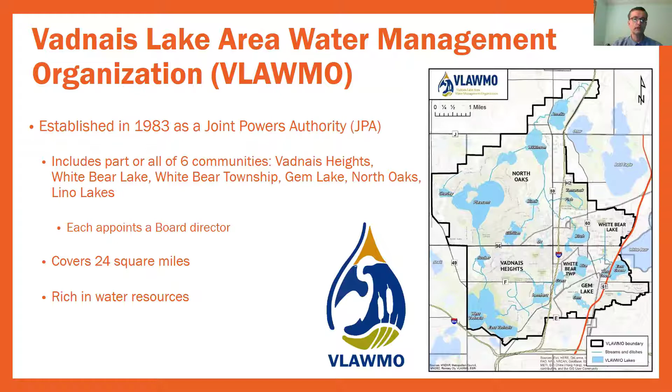Some of the core activities that VLAWMO is involved with its partners include flood management and storage, monitoring and analysis of our lakes, streams, and wetlands, program management and projects, pursuing grants and working with homeowners on various projects and programs, education and outreach including schools and workshops, and also managing the Wetland Conservation Act within the 24 square mile area.

A couple slides on introducing Lambert Creek. The VLAWMO board sees Lambert Creek as a critical priority water body within the watershed, and they are continuing to try to find areas to pursue multi-purpose and partnership-based maintenance operations, storage, and water management and water quality projects and programs within Lambert Creek.

4 critical priorities that we will continue to pursue, including with this project, is to identify and partner on pond projects to store the water and filter the nutrients and make sure that sediment is deposited where it's designed to go. Also to clear tree removal and brush out of the drainage systems and the streams.

Also water control structures called weirs, which you'll hear about tonight, to store water in the right place and meter out the water downstream so it doesn't cause additional problems downstream. And also critical research and monitoring, both from a habitat and water quality standpoint. You can see all these programs within Lambert Creek on our website at the link below.

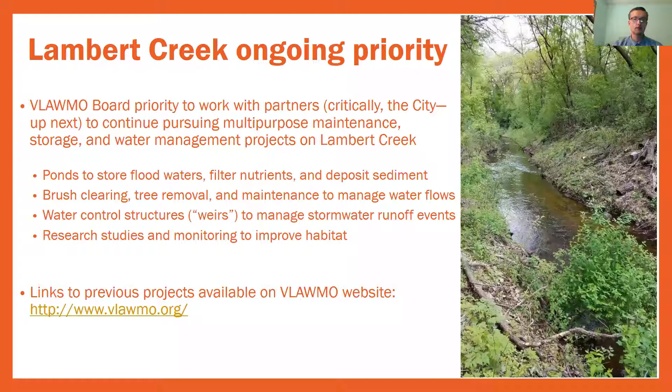I really want to help identify the partners of this project, and nothing we can do at VLAWMO can be successful without our critical partners, including the City of Vadnais Heights, who you're going to hear from Jesse in just a minute, as well as SEH, our engineer, the Minnesota Pollution Control Agency and Environmental Protection Agency, and the University of Minnesota. We couldn't do our work, and this project could not happen, without these great partners.

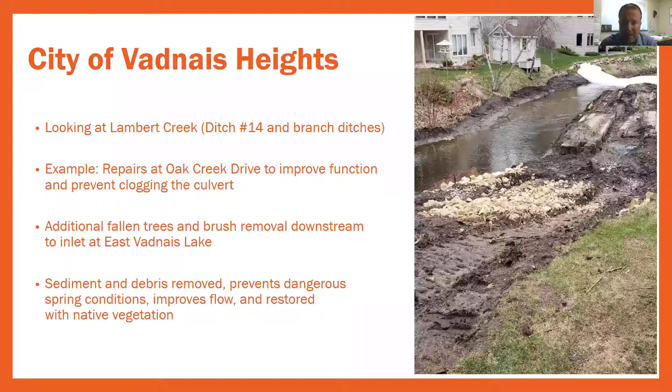And I think I have one more slide, right Nick? Yeah, there's a photo there—if you can see it, there's the project, a little closer to completion. Lots of times when people build things, they don't think about how to maintain them. So what you see there, and some of the things you don't see, are that we built in access to this project, and eventually it'll blend in better than it looks right now. We thoughtfully selected shrubs and native seed mixes, and there's also a maintenance component where even beneath some of the surface, there's aggregate we left in place, so the next time we need to get a backhoe down there, we'll have a way to do it.

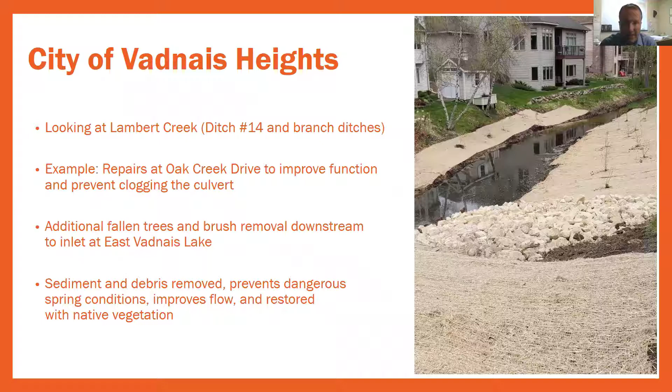Yeah, I think this might be my last slide here, I'm not quite sure, but that's all right. What you're looking at here is some of the sheet pile along the edge of where we're doing a project. Between the grasses and the water you see there, it looks subtle, but that's the sheet pile, and you can see how it's leaned over—eventually it would slough off into this water quality feature.

Some of this property is private property encumbered with a ditch easement, and some of it is owned by the city of Vadnais Heights—we have a parcel through here. Talking about this project a little more, you can see where access is intended to come off of County Road F, and where the sheet pile is getting replaced, that pink line. The photo and the plan view show something shaped like a triangle—that's a stormwater retention basin. It will slow the stream down to a crawl in those locations, allowing some of that sediment to settle out. When sediment settles out there, it's not settling out in other places. As Phil mentioned earlier, we want to take that sediment out at the right place at the right time.

And this project is really going to enhance and maintain that ability to drop the sediment out there, improve the water quality, improve flood storage.

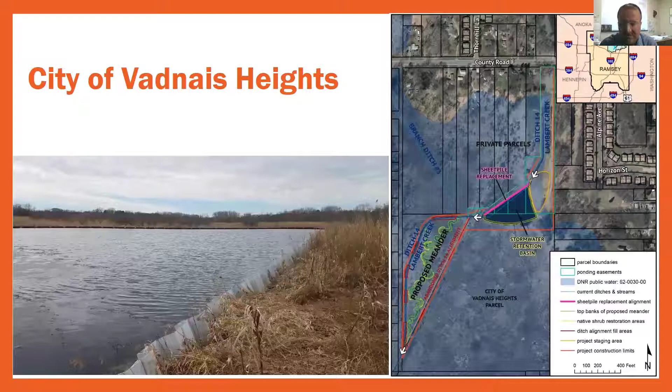I think I've talked enough. Do you want to go to the next slide? Actually, Nick, if you want to go back to the one right before that.

Oh, yeah. Hi, thank you, Dawn. Thank you, Jesse. That was a great introduction, and working on the Oak Creek Drive project was really fun. I'm looking forward to doing more projects like that and watching that one continue to grow and develop.

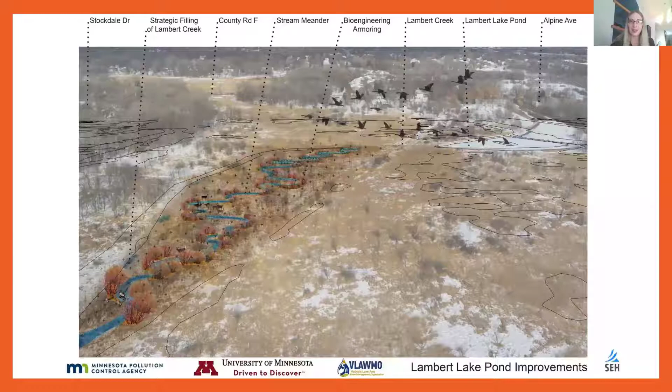As we look, this is drone imagery provided by SEH that allows us to see the full site of Lambert Lake. Lambert Lake is a historical lake that is now primarily a wetland area, and it includes Lambert Pond. So sometimes we colloquially use those terms interchangeably, but the pond refers to the stormwater retention basin that you see at the top right of this image.

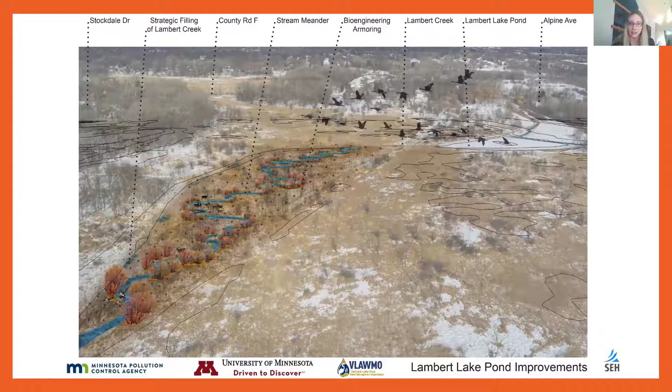You can also see the path of the meander provided here, winding in between the two, what will be previous ditch lines. This just provides a really nice overview of the project and gives you a chance to see it in context. Next slide, please.

It starts at East Goose Lake - that's the headwaters. East and West Goose flow into Lambert Creek. Those lakes are both impaired for nutrients. It flows into Lambert Creek, which is impaired for bacteria - I'll talk about that more in a moment. Then through Rice, Grass, and Lambert - we call them lakes, but they're large wetland complexes now - they have the ability to treat the water as it's flowing into East Vadnais Lake.

East Vadnais Lake is the reservoir for drinking water for the water utility, St. Paul Regional Water Services. The water quality in East Vadnais Lake is very high quality, but it's also a concern of ours and a reason we want to be working on the creek, because we have existing impairments for bacteria and for nutrients, and we want to do our best to try to keep those pollutants from reaching the drinking water reservoir.

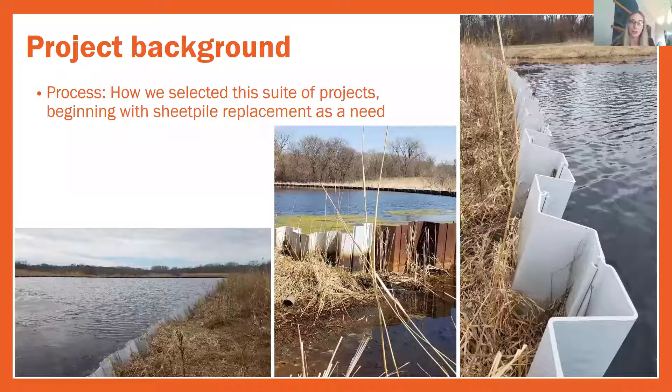So we began by meeting with a local excavator and asking for advice about what our time frame would be to look at repair or replacement for the sheet pile. He used his expert judgment to give us a rough idea, but said that he thought we had a couple of years before we would need to do repair or replacement on this sheet pile.

So we started working on our project and on funding. We prepared our application to MPCA for a loan for the sheet pile portion, because grant funds can't be used for maintenance for most grants, and that was true for the grant we were applying to. So we looked at a loan for the maintenance portion, and then applied for grant funds to do the other portions of the project, which includes building the Meander and adding some biochar treatment cells that I'll talk about in a little bit to remove bacteria.

As we continued working on the project, we got our application in and found out it was selected for funding. So we began working closely with SEH at that time to figure out exactly what the design and the dynamics required for that sheet pile would need to be.

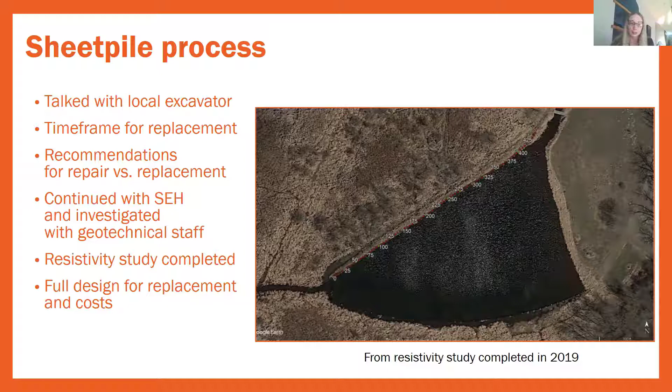Next slide. A resistivity study was done first to help determine what would be required for the sheet pile, and Emily and Jeremy will talk about this more in a little bit, but I'm just introducing it here. That involved passing electrical current through the ground to find the depth of solid substrate where the sheet pile would need to be anchored.

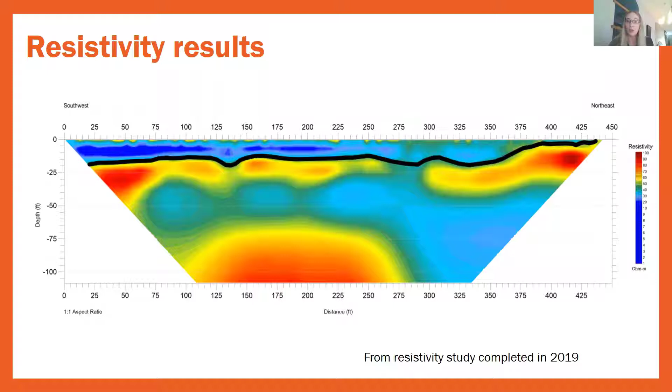That kind of technology wasn't readily available in 2004 when the vinyl sheet pile was originally installed, so this was new technology we were able to apply at this site to determine what depth would be needed for long-lasting sheet pile on the north end of the pond. This was determined to be up to 32 feet in some places, so we needed to take into consideration what was there for the existing sheet pile and what would really be required, if replacement or repair could be part of the solution.

Next slide. That information allowed SEH to design the depth of sheet pile along the entire wall. As part of that, the 32-foot depth required in some places helped us determine that repair or even salvaging parts of the vinyl sheet pile to reuse in some places really wasn't a viable possibility, both because of the condition of the sheet pile now and because of the total length originally installed.

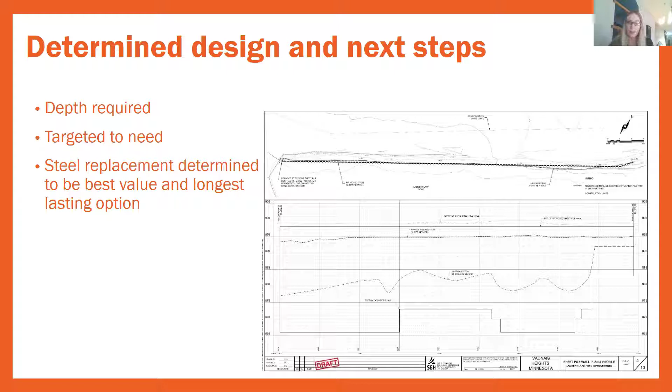So the best value and longest lasting option at that point was determined to be full replacement with steel sheet pile on the north end. We expect that to hold up like it has on the south end and last for many, many years and even decades.

As we look at the sheet pile replacement, the major contribution here is flood control. If the vinyl sheet pile in place now was allowed to fail, we would have flooding events as a direct result, so we knew we needed to take care of that. The cost for the materials is estimated at about $550,000, and that is being provided by a 0% interest Clean Water Fund loan from the MPCA.

We were able to secure that as part of the grant funds and the grant portion of the project, which I'll explain coming up next.

The sheet pile and the pond provide critical water storage. If it was allowed to fail, flooding would result. The sheet pile also allows the pond to bounce, so it can rapidly increase or decrease in water level instead of the entire system around it doing that. It also holds water and allows sediment to settle out and be removed.

As the water exits Lambert Creek and flows onto East Vadnais Lake, it is in a cleaner state because of the pond. So reinforcing the pond and taking care of it was a really important priority for us.

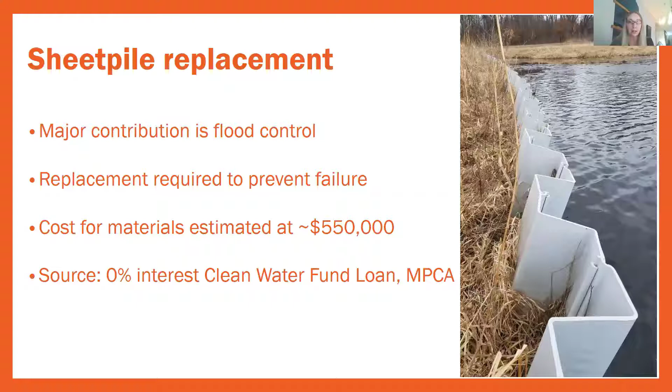This location at the pond is also very important for us because an access area was built as part of the project in 2004 that allows easy access to the site for future removal of sediment from the pond. We know that over time, sediment is going to build up there, and this is a place that we can access for continued maintenance very easily.

So as we were looking at the site, we knew we needed to work on sheet pile. We also wanted to look at the system in a more thorough way, so we began thinking about ideas for what a meander would look like. A meander puts the natural shape of a stream back into an area that had been ditched previously, that is ditched currently. So we started by doing site visits with engineers.

We also had drone flights that were flown both in the wintertime and with SEH using thermal imaging to look at possible areas where groundwater might be upwelling in this system. If we had areas where groundwater was coming to the surface, that could affect success of the meanders, so we'd want to avoid those areas. The drone work at the site allowed us to rule out that we don't have any groundwater upwelling areas that would cause a problem to the current design.

We also looked at habitat dynamics, and we consulted closely with DNR to do that. SEH conducted research to compare with similar streams in the area to inform what a natural shape should be like in this system that would allow connection to the floodplain, which we'll talk about more in just a little bit.

And we conducted remote camera research on site to help us understand the habitat value, what animals out there are already using this site, and how can we help to serve them as we're working on this to make higher quality habitat for them. We did all of this with very careful consultation with our agencies, including DNR and the Army Corps of Engineers.

The project in 2004 had permits with both of those entities in place, and we are amending those permits as we go forward on this project.

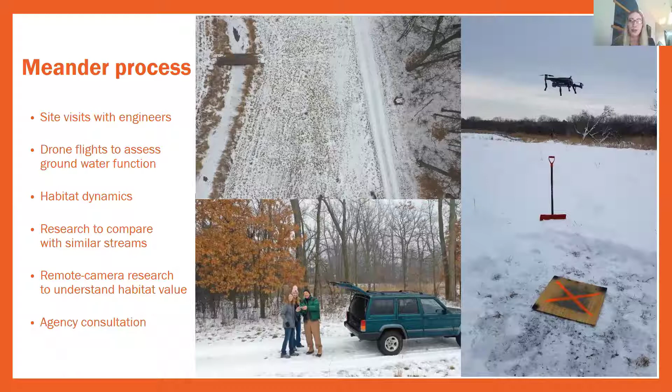So all of that work that was done earlier, including securing the easements, the permitting work, the building of the pond, and the ditch lines that occurred, all helps to inform and support this project that is currently happening. So we're modifying a system, and we're able to really use the work that was done before.

Other species in the area, we have a federally listed species, which is the rusty-patched bumblebee, that isn't found at this site, but is found in our watershed. So we've been looking at adding flowering plants to the system when we get to the revegetation stage that will help to support rusty-patched bumblebees and other pollinators in the area.

We also have Blanding's turtles, again, not found at the site, but found in a lot of wetlands in our area. So the species of concern that are present in and around this area have helped to inform the plans for the vegetation work that will follow in the spring, following construction in the winter.

The major contributions of the meander are to capture sediment as it's moving along in that twisting and turning pathway, and to reconnect to the floodplain. More interaction with the floodplain makes for a healthier system. So that's one of our goals with this project.

We've had a lot of concern from residents, and we want to make sure you know that in the design, planning, and consultation with agencies and other entities, this plan does not increase flood risks to properties. The engineers will talk about this more and explain it in the designs. But it does allow sediment deposition along the meander, which can help protect downstream infrastructure like Oak Creek Drive.

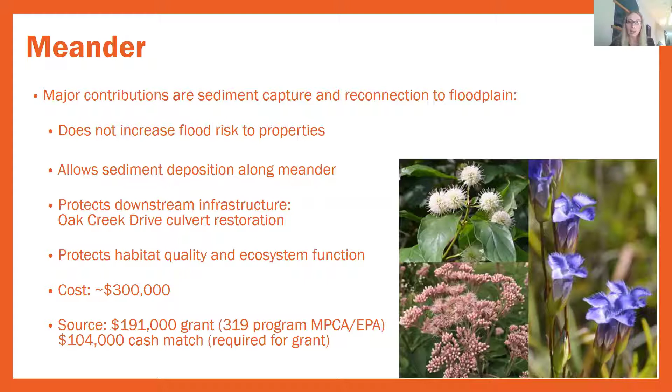It also protects habitat quality and ecosystem function, and the cost is about $300,000, provided through grant and cash match. The cash match was part of the grant program, which is administered by MPCA, also with consultation, with funds coming from EPA.

At that high temperature, it creates a lot of surface area. That large surface area allows the material to grab onto or catch bacteria and nutrients as it moves through. Biochar is being used by a lot of watersheds around the nation, and also in the metro area, often in conjunction with iron-enhanced sand filters. A couple of examples are the Coon Creek Watershed District and Shingle Creek, both using biochar in their filters.

We're working closely with University of Minnesota scientists on this, including the Twin Cities campus and the Duluth campus. In Duluth, the lab at NRRI is creating the biochar. They have a kiln at their lab where they're able to make it, and they're also doing lab tests to help identify the best composition for Lambert Creek itself.

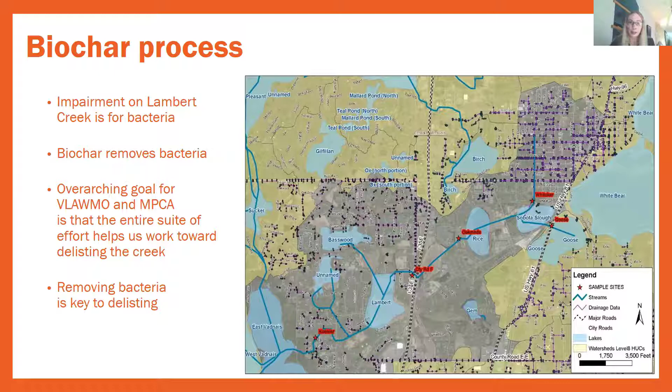The locations for the bacteria study are where we have flumes constructed. A flume has known dimensions, which improves the accuracy for sampling. We have automated samplers running now at these locations, and you can see them live—they run all the time and report real time to www.monitormywatershed.org, so you can see what's been happening in the past.

You can watch as we continue into the future and work on construction and the other side of this project. You can also download data from the past, so if you don't get to check it out for a while, you can check it out later and see everything that's been recorded. There are 4 automated units running, collecting data on the creek in real time for us, so we'll be able to look at pre and post results—what are the outcomes of this project?

So these three components together are really a combined package. They allow us to take a very thorough and comprehensive approach to water quality management here, with the sheet pile replacement, the meander construction, and the biochar treatment cells all working together to provide flood protection and to improve the quality of the environment. This is a package that enhances the resilience to an otherwise straightened and overtaxed system.

When we look at the wetland quality out there right now, we see only a few species. We see a lot of cattails and tall grass, which is Phragmites. We have native Phragmites out there, but it's very dense. We only have a few species because we're getting a lot of nutrients into those wetlands and they can't function like they're intended. This will help with that function as we continue with this project and other projects over time.

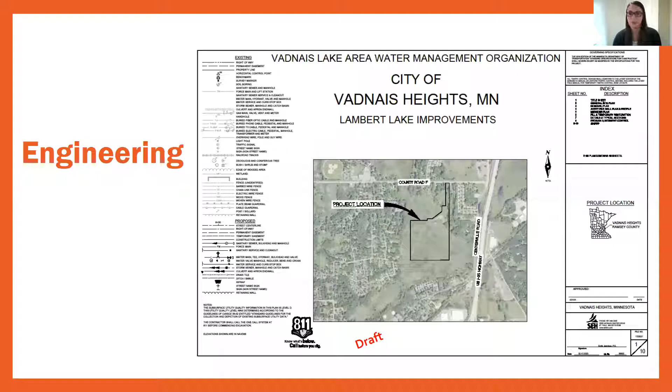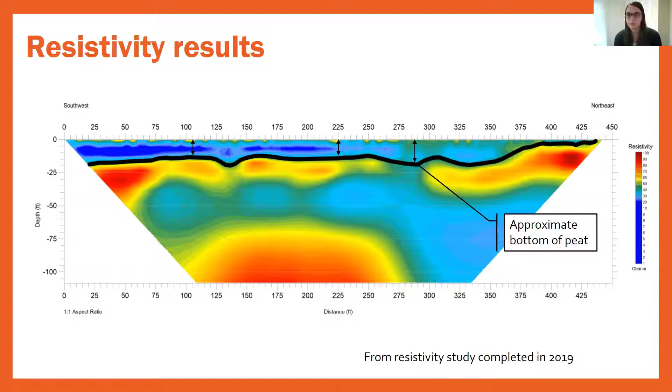So like you saw earlier, we did a resistivity study, and these are the results. What this resistivity is essentially a measure of soil density, and that allows us to identify where the organic soils are and where more granular soils are at the site, so we know how deep to drive the sheet pile. There's a thick black line on this colorful graph, and what that indicates is the approximate bottom of peat underneath the proposed sheet pile area. Next slide, please.

The drainage area that comes to the Lambert Lake area is from the interstate, and it also has a handful of commercial and other residential properties, so those have a certain type of pollutant loading associated with them. So the pond here is really part of this meander system. It's really like a pre-treatment to the downstream wetland and the meander. So it all really does work together as one system, and the pond is a very valuable part of that.

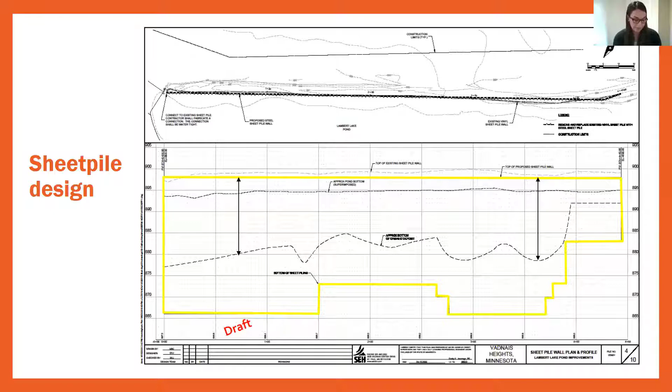Next slide, please. So before I hop right into the meander design, I did want to make a mention that there are several authorities and agencies that were involved in this project.

So in addition to the Watershed District, who is also the LGU for the Wetland Conservation Act, the city themselves have an MS4 stormwater permit, so there are considerations there. The Lambert Lake area is a DNR public water, and the entire project exists beneath the ordinary high water level of that public water. It's also water of the U.S., therefore the Army Corps of Engineers was involved, as we will be applying for a nationwide permit from them. And then the area does also happen to be a floodplain for the Federal Emergency Management Agency flood insurance program.

So there are considerations made for FEMA. Our design was really influenced by all these different requirements, but the big takeaway here is that the project will follow all the regulatory requirements, and it has to in order to achieve, obtain authorization by those permits. Next slide, please. Thank you.

So now we kind of move into the meander. In addition to the regulatory agencies and other stakeholders, the site's hydrology and hydraulics also played a huge role into the meander design. We used the DNR stream channel design criteria to establish this natural channel, but it really had to fit the drainage area and the wetland characteristics. So all those things kind of mended together, and we were able to come up with this functional design to work for the goals in mind.

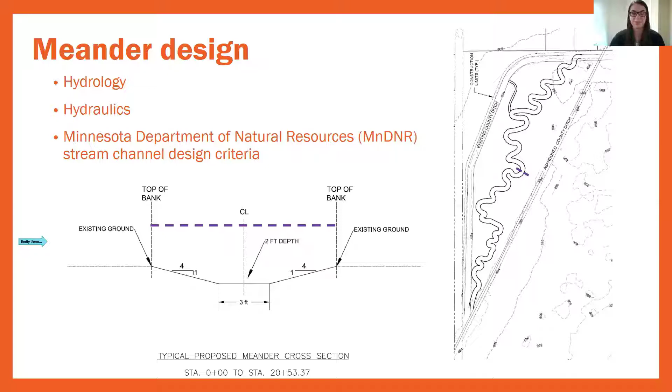And the point of this design is that this meander channel is supposed to interact with the floodplain. We expect that the water will exceed this and move its way through the wetland. And the purpose of that is we get a great water quality component, but there's also quite a bit of flow attenuation that will occur, and just an overall, as Don mentioned, healthy wetland area. I think we can move on to the next slide, Nick.

So I did want to stop and discuss the floodplain for a moment. As I had mentioned, this is a FEMA floodplain, and the floodplain is really also part of this system. As I mentioned, the meander is designed to interact with this. However, let's take one step back here. So the floodplain, for those who aren't aware...

So Lambert Lake, in instances of a large rain event, would function more like a lake. You would see water within that area. That's expected and it's natural. So as I mentioned, it's a part of our system.

Earlier, I had shown a smaller dotted line of a cross-section of our design meander. However, we really did take the floodplain into consideration as well. An important reassurance that we wanted to highlight is that any work in a floodplain requires a no-rise certificate, and a no-rise certificate requires that there's no increase in flood elevation. So we wanted to point out that this project will not cause any changes outside of the project limits. There will be no change to water elevations within the area.

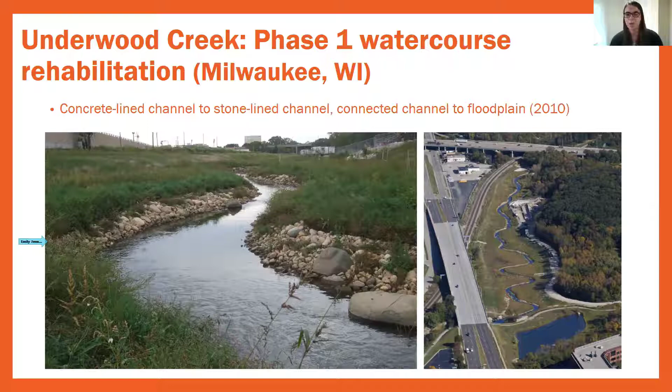And lastly, we just wanted to highlight another project that was completed by SEH, just to give an idea of what this could look like when it's finished. This is a slightly different project in that this was a less natural channel. What you see here is a stone-lined channel, but it used to be a concrete-lined channel. It's in a much more urban setting, and meanders were used in this project to also have greater interaction with the floodplain for some improved water quality of the area. So although the Lambert Creek project will be slightly different, it's just a good picture of what's to come for this project. Back to Dawn for a moment.

We thought you might be wondering what's coming up for our next steps, so we wanted to provide that as we near the end of our presentation. We are working on permitting right now with SEH, and we anticipate that will be completed this summer.

There will be additional opportunities for you to comment if you would like to be part of our June 24th and August 26th board meetings. Those will be publicized on our website, and we certainly invite you to attend.

We'd like to hear from you. We will be continuing to plan, and we hope to request construction bids by late summer. Erosion control measures will be put in place starting this fall and winter, and we're looking at winter construction with vegetation restoration following in the spring.

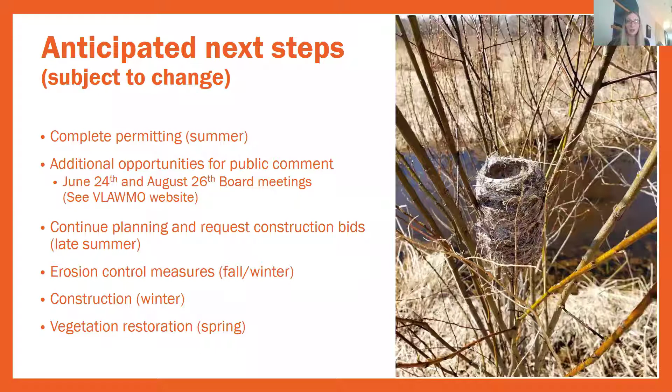We have a number of resources that we'd like to make available to you. The Star Tribune did a really great article on the 10th of May about the value of natural curves in streams, and especially highlighted some projects in Rice Creek where similar projects have been done.

The EQB monitor was just published this week, and it has the environmental assessment worksheet for Lambert Creek. That opens our comment period, which opened on May 19th and will run through June 17th. The EAW itself is also available on our website—you can find it right from the homepage, and we would certainly appreciate your comments on that.

And we've been posting monthly updates on our website about this project specifically, so you can always check in to see where we're at with those.

For the connected vision, like Jesse said earlier, water falling on every yard, driveway, or street—even when water is on turf grass—some of that water is getting shed off the surface. So as it collects and comes downstream, every property is actually an opportunity.

So we invite you to be a part of this process. We have a cost share program. Most residents work under the landscape level 1 cost share, so we do projects like restoring stream banks, planting wet areas with native plants, and projects to support storage on the landscape.

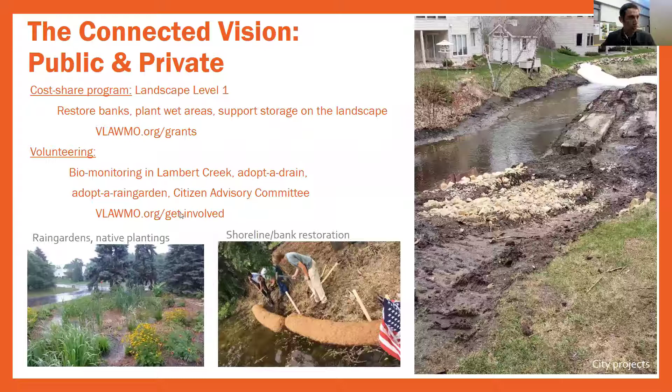Here we go, from Cheryl: How big of a storm would this project handle? Thanks, Cheryl.

Anyone want to chime in there? I can chime in. The Meander itself is designed to be anywhere from around a 2-year event, and that's the DNR design criteria. A 2-year event is a more frequent event, something you see happening often—I think it's a 50% probability in any given year. But the floodplain itself, what you saw there, was a 100-year event. So everything in between would fall between those boundaries. It's not to say the wetland area itself couldn't handle a larger event; those are just the design pieces that are mapped.

Cheryl, if you wanted any additional information, please keep going with your questions. Yeah, great, so here's one.

How will this slow the water flow upstream? This will not slow the water upstream of the project area. That water should be expected to act as it is now. Within the project area, the water will be slowed down slightly because the channel length is actually getting longer, therefore we have a flatter slope.